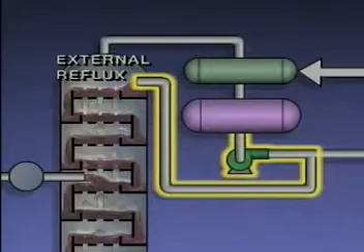Temperature control is crucial to the operation of a distillation system. Correct temperatures are necessary to vaporize the lighter components of a liquid mixture while keeping the heavier components in the vapors to a minimum. If the temperatures at certain points in the system are either too high or too low, acceptable products won't be produced.

Let's go over several points in a distillation system where temperature is monitored. As we do, keep in mind that the mixture we'll be referring to is a binary liquid mixture, that is, a mixture that has two components.

We'll begin with the temperature at the top of the tower. The temperature at the top of the tower should be at or slightly above the boiling temperature of the desired overhead product at the operating pressure of the tower. If the temperature at the top of the tower is higher than it should be, more of the heavier components will vaporize and become part of the overhead product, instead of flowing down the tower as a liquid.

On the other hand, if the temperature at the top of the tower is lower than it should be, less of the lighter components will vaporize. Some of the lighter components will remain as a liquid and flow down the tower.

The temperature at the bottom of the tower is also important. The temperature at the bottom of the tower is usually slightly below the boiling point of the heavier component. If the temperature at the bottom of the tower is too high, more of the heavier components will vaporize and move up the tower instead of remaining as a liquid.

If the temperature at the bottom of the tower is too low, less of the lighter components will vaporize and move up the tower. Another place where temperature control is important is at the feed point.

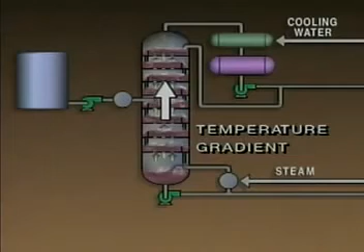While the temperatures at various points in a distillation system are important, the relationships between the temperatures are also important. The temperature decreases as the material moves higher in the tower. The gradual decrease in temperature from the bottom of a distillation tower to the top is called the temperature gradient. The temperature gradient is measured in terms of the difference between the temperature at the bottom of the tower and the temperature at the top of the tower.

In order to maintain the proper temperature gradient, temperatures at critical points in the system must be controlled. Temperatures in a distillation system are typically controlled in three ways. One way is to control the temperature of the feed mixture by using a preheater. This regulates the temperature at the feed point.

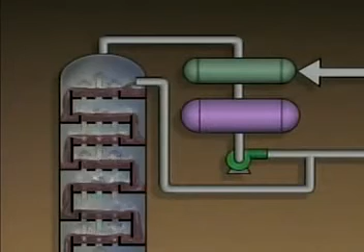At the bottom of the tower, temperature is controlled by the amount of heat that is added by the reboiler. This added heat is referred to as boil-up. The temperature at the top of the tower is controlled by the amount or temperature of the cool liquid that's pumped back into the tower from the overhead receiver. This is called the reflux rate.

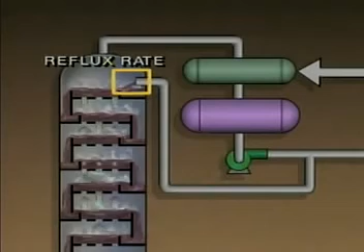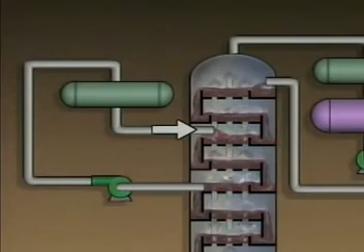Increasing the reflux rate decreases the temperature at the top of the tower. Some distillation systems contain equipment known as pump-arounds. The purpose of a pump-around is to remove hot liquid from the tower and pump it through a cooler. The cooled liquid is then reintroduced at a higher level in the tower. A pump-around helps control the temperature of the internal reflux.

Since pressure affects the boiling temperature of a liquid, it's an important factor in the distillation process. If pressures in a distillation system are not correct, product purity could decrease. Tower pressure is often controlled by a pressure control valve located on the overhead receiver. This valve controls pressure by releasing vapors and any non-condensable gases that have collected in the receiver. In some cases, a vacuum system draws gases from the receiver to control tower pressure.

Another pressure that's important to an operator is the tower's differential pressure. The tower's differential pressure is the difference between the pressure at the bottom of the tower and the pressure at the top of the tower. This difference in pressure is caused by the flow of vapors in the tower. Without vapor flow, there is no differential pressure.

Generally, if the rate at which the vapors move up the tower decreases, the differential pressure will also decrease. And if the rate at which the vapors move up the tower increases, the differential pressure will increase. Changes in the differential pressure may indicate that a problem exists.

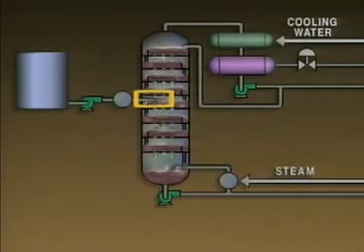For example, an increase in differential pressure could be an indication that the feed rate is too high. Too much feed entering the tower will overload it. If this happens, the differential pressure will increase, and the tower will be unable to make the desired separation. In this case, it might be necessary to decrease the feed rate.

Changes in the tower's differential pressure may be caused by other problems. For example, if the differential pressure increases, the boil-up rate may be too high. In other words, the reboiler may be returning too much vapor or vapor-liquid mixture to the tower. This problem can be corrected by reducing the boil-up rate.

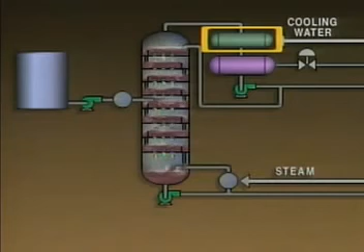Another problem that may affect the tower's differential pressure is a decrease in condenser efficiency. If the condenser's tubes are plugged or there's not enough cooling water flowing through the condenser, its pressure will increase. As a result, the flow of vapors from the tower to the condenser will decrease, and so will the vapor flow up the tower. This means that the tower top pressure will increase, and the differential pressure will decrease. If a condenser problem is suspected, the condenser should be checked, and corrective action should be taken if necessary.

Changes in the tower's differential pressure may have other causes in addition to the ones we've identified. So it's important to carefully evaluate any situation before corrective action is taken. In this topic, we looked at two key factors in the distillation process: temperature and pressure. Remember that although we discussed them separately, temperature and pressure work together. Both of these factors must be correct for the distillation process to work properly.

Now, try to answer some practice questions to check your understanding of what we've gone over.

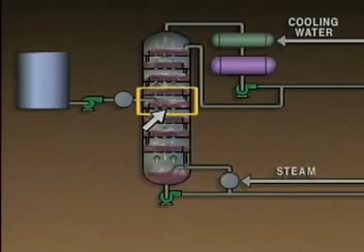Another place where temperature control is important is at the feed point. The temperature at the feed point should be within the boiling range of the mixture, and should be close to the temperature of the feed tray. The temperature of the feed tray depends on its physical location in the tower. For example, the lower the feed tray is in the tower, the higher its temperature will be.